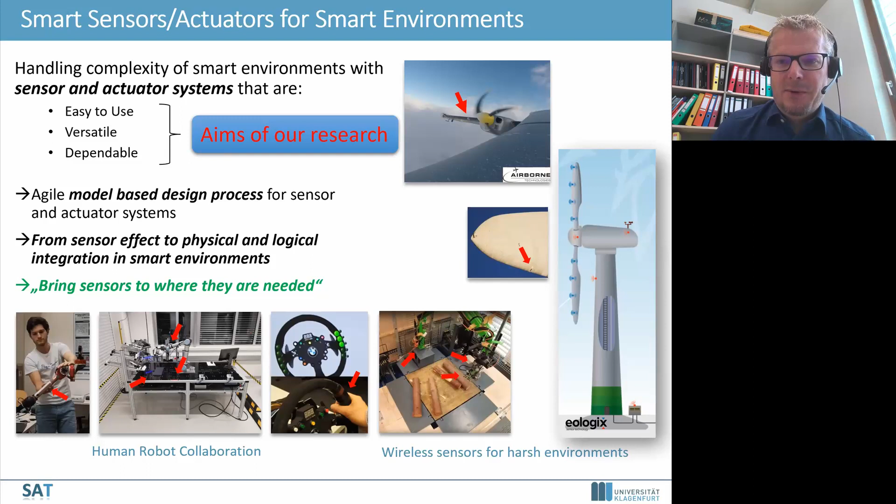And considering the development of sensors, of course, this starts really from the low level, from the technology and sensing principles, then the evaluation of the sensor signals and sensor electronics, and then signal processing inside the sensor. So we have a lot of low-level aspects to be covered, and also the simulation of the sensor effect, for instance, in finite element simulation, usually addresses just the sensor itself. But what has become feasible in the last years is to also consider the higher levels, like mid-level calibration, sensor fusion, and so on, even up to the high level of decision-making and task planning, which I find quite important for the functionality of the sensors and the requirements that we have.

And so designing a sensor first, then bringing it into the application, then developing the high-level applications, and at the end finding out if the sensor we have developed is a good device may not be the best approach anymore. So what we try to do is basically to speed up this loop and not follow this traditional V-model approach. Even in research, hardware development is quite often a time-consuming task until we really have this hardware and all the relevant components realized.

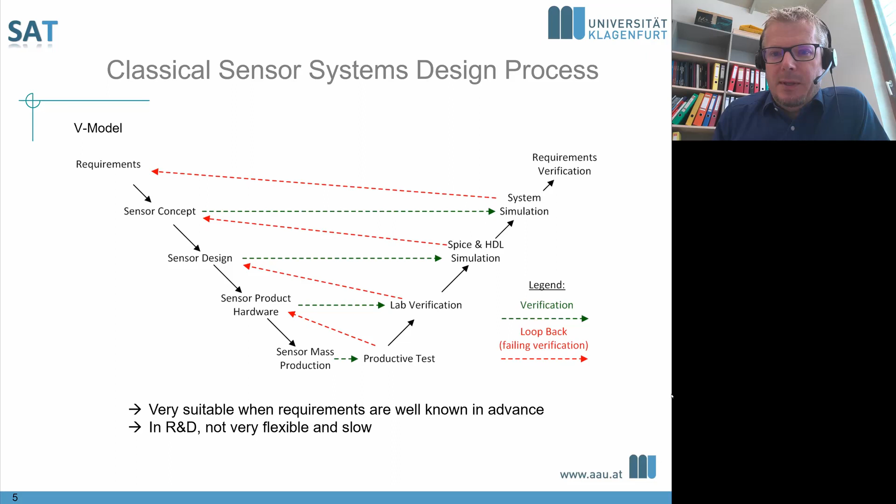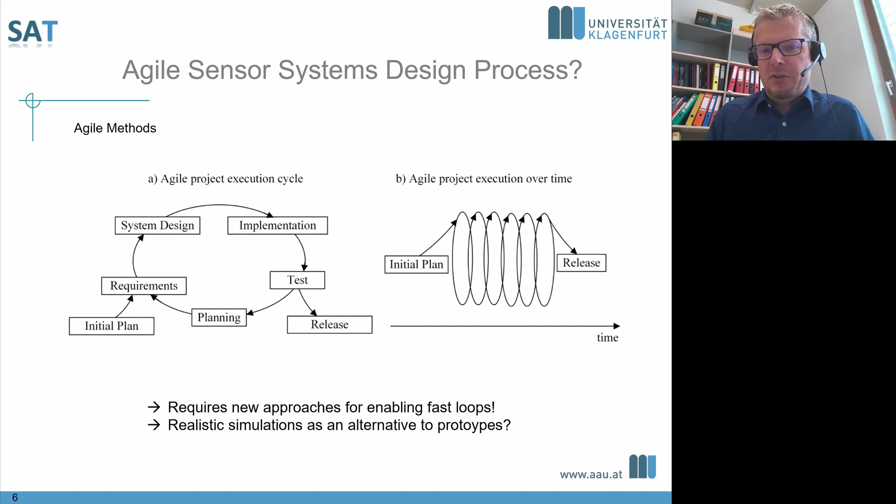So we also want to have a closer interaction with those who are strongly using the sensors on the higher levels, such that we can speed up the whole development in some sort of an agile process also for hardware development, get faster feedback, and adapt to what is needed in a better way. And since we cannot always have all these devices realized and implemented faster, one approach that appears to be interesting is to bring realistic simulations into system simulations so that we can showcase and discuss such implementations of sensors at an early stage.

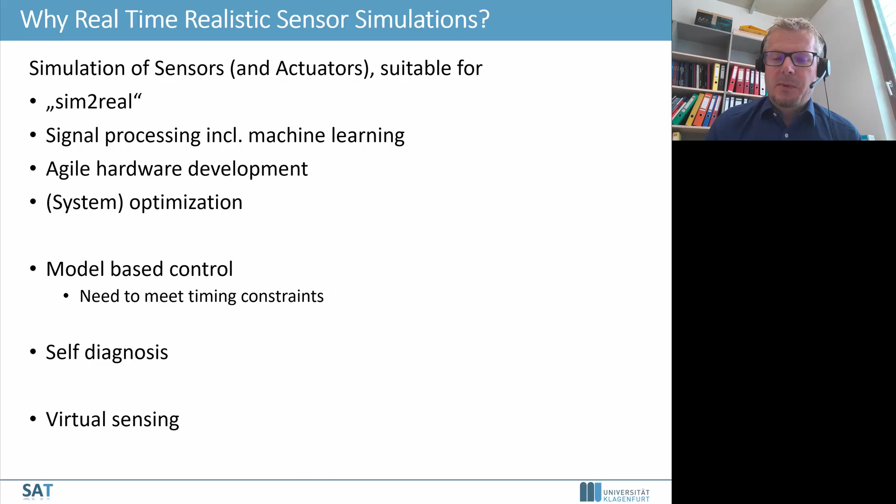And this is kind of a motivation for us. Whereas in general, of course, Sim2Real has been a buzzword lately, also using simulations, for instance, in machine learning and utilizing these experiments that can be done effectively on the computer. But for us, it also goes one step further, that we also want to use it in the development process already, and then we can have further benefits out of these models that we develop when they are accurate enough, like model-based control, self-diagnosis, and even virtual sensing can be based on such models. So quite useful from that point of view.

Nevertheless, I would like to show one slide from the second workshop on closing the reality gap in Sim2Real transfer robotics. That was at RSS 2020. And quite interesting, even the people who are interested in Sim2Real applications see this sometimes a little bit critically, like more than 20% even consider it a waste of money and time to go into this. Nevertheless, the majority believes it is useful. And also the majority thinks, okay, this is something new. It's not just simulation; bringing simulations that we have done for sensors for a long time together with the system simulation of the robotic application, and using this for the design of the devices is, at least for us, quite a new approach.

What is also debated is if high accuracy is needed for such simulations, and it is not that clear if this is really the case. And I will also go a little bit into this discussion. So our aim is actually to provide quite realistic models for our sensors, for the proximity sensors in this case that we are addressing here.

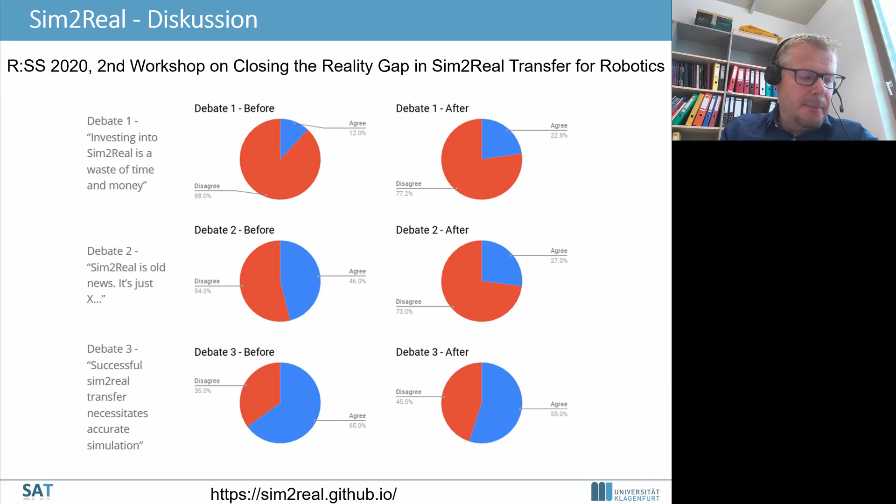Let's look a little bit at proximity perception sensors that are out there. Vision can be used, of course, also infrared; thermal emission is used in these scenarios. LiDAR, TOF cameras, flash LiDAR are also approaches that are used. Radar can be used, sonar, and near field proximity perception. We had in the previous talk also capacitive and inductive sensors. And then next to proximity is touch, which has been discussed quite a bit, that this interaction with the objects is one of the very big topics right now.

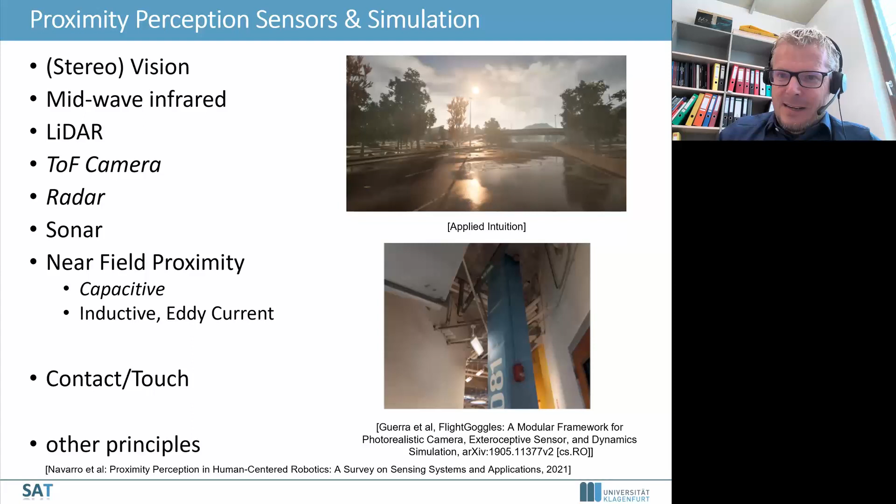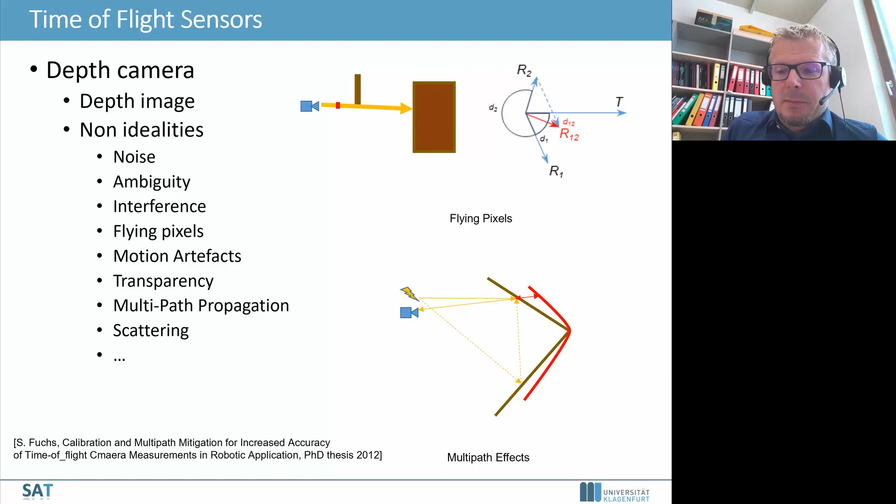So this is something that we are currently working on. There are already some solutions for these aspects, but I would say this is more straightforward coming from the computer graphics applications. But what we have also addressed are other proximity perception sensors that utilize the same simulation chain out of these computer graphics approaches.

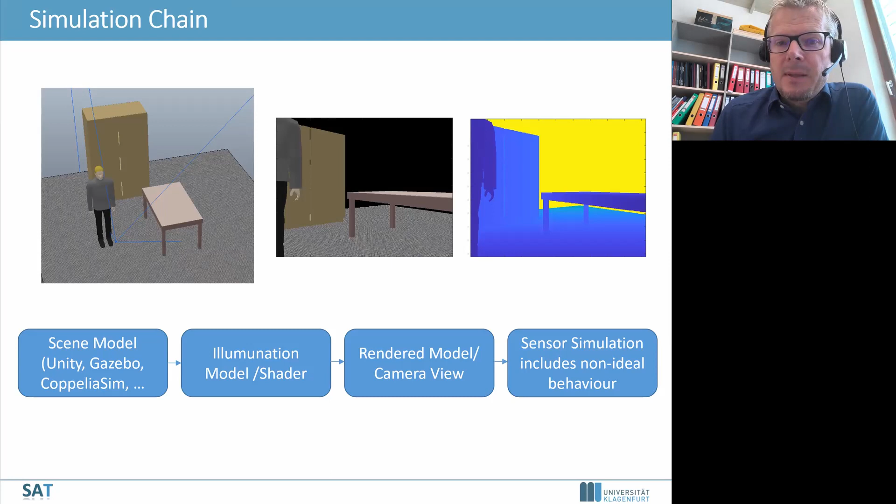You see here an illustration of a scene that gives us the visual image and also the depth image, which we can then take as inputs for these modifications to compute a sensor output out of such a representation. So we can use it to obtain the geometry information, and by encoding material properties, for instance, in the colors, we can also include information on the materials. When we compare now different principles, namely the three types of sensors to discuss today, there are time-of-flight cameras. They are high-resolution sensors.

We can more or less see this as single beams per pixel, so we have a clear and high directional sensitivity for these devices and a very high number of individual sensors. In the radar scenario, it's not as high resolution anymore.

Typically, we have few antennas, and the directivity of these antennas is not really just a single ray that we get, but we have accumulated somehow from different orientations, and we can still recover something with signal processing and these antenna arrays to recover, for instance, the angle of an object in the field of view when we have multiple objects, but still we have a rather low angular resolution.

And this gets even worse for the capacitive sensors, where we have even more blurred results for the scene that we look at. Nevertheless, we can take this chain that we had before to take here the input for a simulation that gives us then a more accurate model of the raw data that the radar sensor would generate and that the capacitive sensor would generate. And now I would like to go a little bit more into detail on how this is done on the example of the radar sensor.

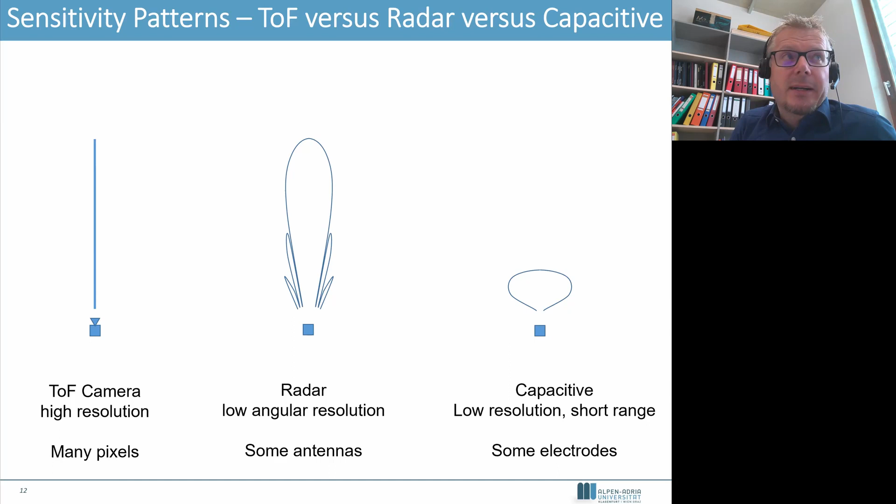General advantages are here, of course, that we have light-independent sensors with the radars that can also provide the speed of the object in the scene, but we do not have as many pixels as we have with, for instance, these time-of-flight cameras. Why would we simulate these devices?

Well, of course, to use the data for AI-based methods, but we also can test different sensor configurations that may not even be available yet in such a configuration with this number of antennas and so on. And so we can do studies in advance and basically even decide or contribute to what type of configuration of the radar sensor would make sense.

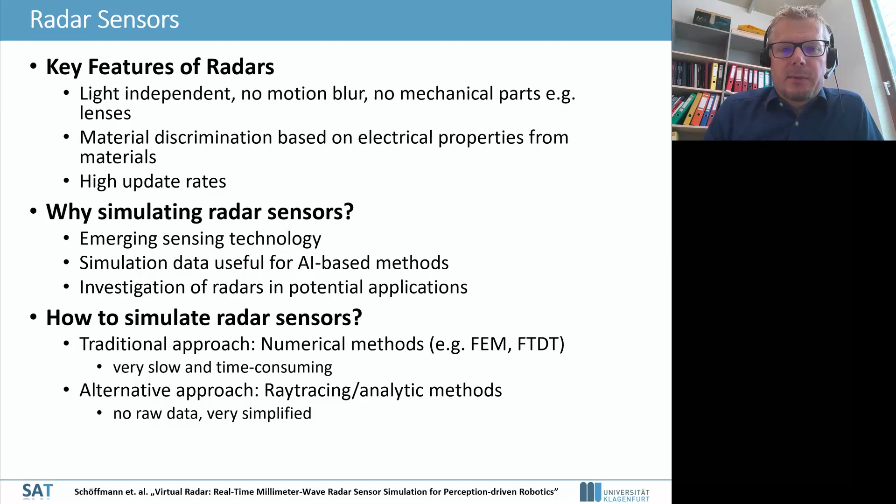And the simulation approaches like the finite element method and the classical approaches are comparatively slow. Ray tracing approaches are also rather slow. And so what we have done basically was to combine this with computer graphics approaches, giving us here the depth maps.

Quickly, how do these radars work? Specifically, we have been addressing here frequency modulated continuous wave radars. In essence, they send out the beam and modulate the frequency. So the frequency increases over time. And so there is a time delay between the received signal and the transmitted signal, and the time delay corresponds

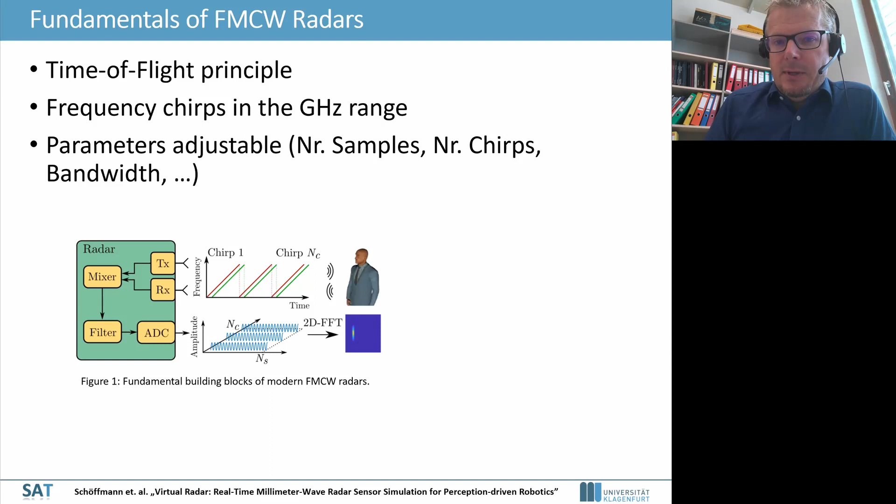to the frequency difference. And after mixing, basically this frequency difference can be seen, but it's not that you just get one reflection, but basically you get a mixture of all these reflections that we have in the scene, and this then leads essentially to the raw data that we receive.

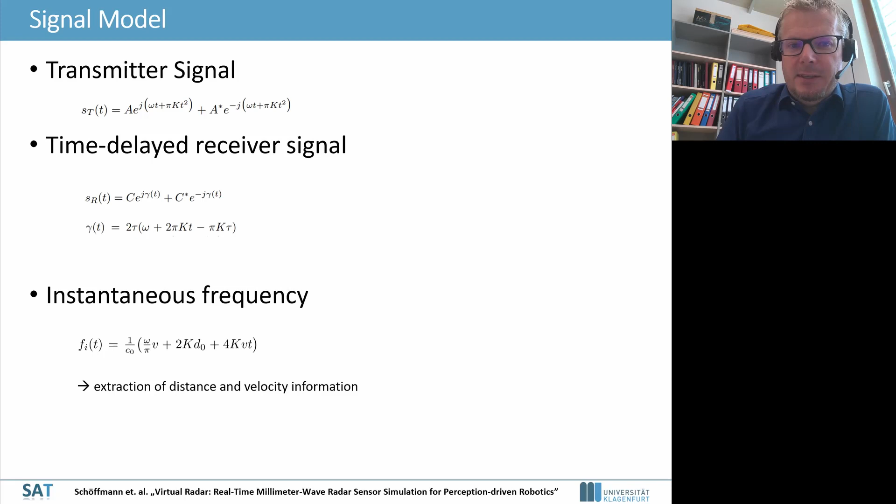So basically, we have a transmitted signal, a time delayed received signal, and the frequency corresponds at the end to the distance. And we can also do another Fourier transform over subsequent chirps to also obtain the velocity information for this received signal.

And in the modeling, basically, we take this image that we get from the simulation, so actually the camera representation is the depth camera, and then from all these contributions of all the individual pixels, the received signal is computed, and the reflections on the surfaces follow a comparatively simple model, which has a diffuse and a specular component on these surfaces of the objects.

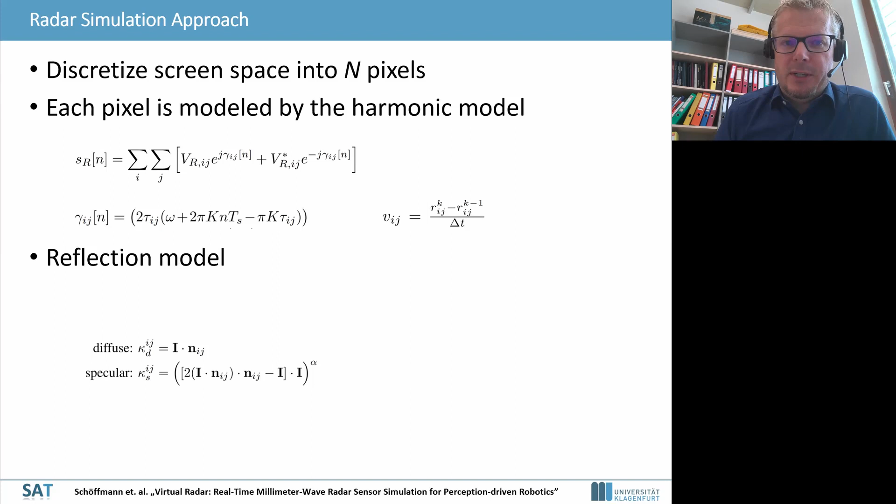What can also happen with these radar sensors is that non-conductive material is partially penetrated, so you get reflections from each boundary essentially, not only from the first boundary. So here multiple Z buffers could be used, and then the signal can be combined from the individual distances. So the larger the distance, the higher the frequency.

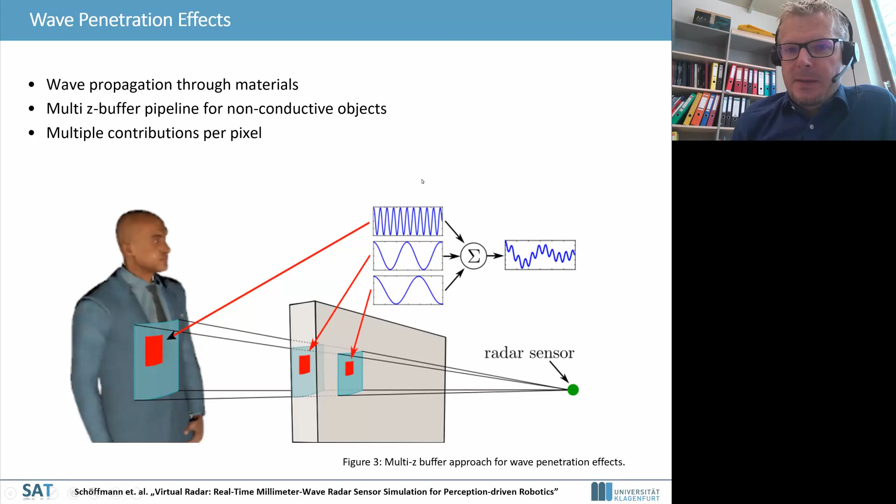So at the end we get a mixture, and finally applying an FFT, you can actually again resolve these different components and say, okay, we have more reflections, more distances here in the scene. So this has been included here. For a simple scene here with 3 rods, as shown, it was also tested in comparison with real measurements.

Actually, you see here that they are quite nicely resolved, and you also get this point cloud representation. So each of these rods essentially represents one point in here, and this can be nicely resolved in such a simple scenario. Here, every object is clearly distinct from each other, and the simulation and the real scenario have quite nice overlap, so very similar results.

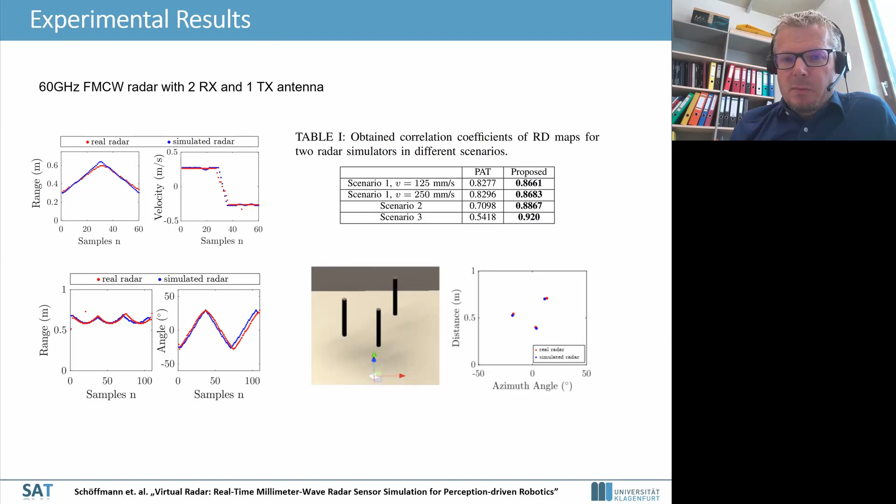The situation becomes much more difficult when we are in more realistic scenarios, like here, a human moving around, and there is not just a single object, but this one object with these extensions and so on gives, of course, a mixture with different distances, and then just assigning more or less one point to it is quite different.

And this is not just the case for the simulation, but also for the real radar. And what we see here is that we have quite some variability in both signals. Nevertheless, the general behavior or the general characteristic of both scenarios is quite similar. So even if we would tell the human to take the same trajectory twice, there would be a difference between this, and this difference would not be much more than what we have between the real radar and the simulated radar.

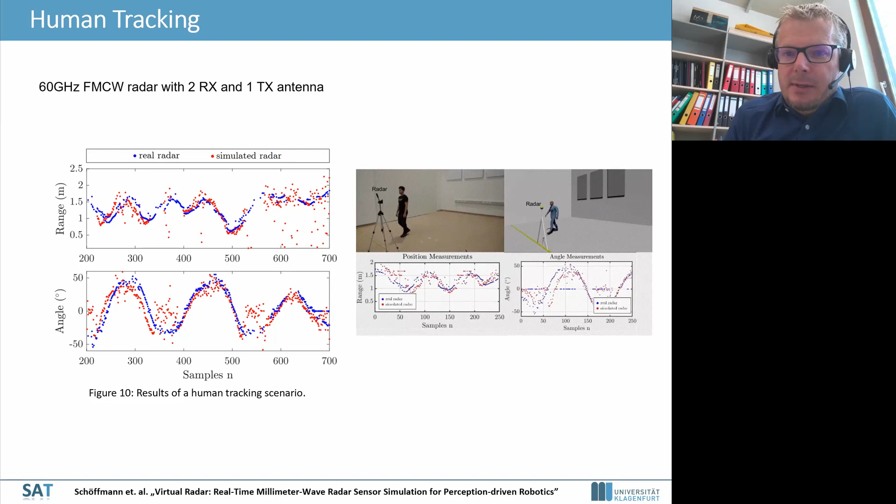So still, this is considered a reasonable accordance between the simulated and the real data. And in particular, we have also compared it with other approaches and still get a good match with the real measurement data.

And as mentioned, this can also be investigated with obstacles in between that are transparent or partially transparent for the radar signals. And also here we have similar characteristics, but you see basically that you get an additional reflection from this object in this representation on the left that shows basically where this object is and with which velocity it is actually moving.

So this work basically was presented this year at IROS. The main contribution is from Christian Schöffmann, also present in this meeting today.

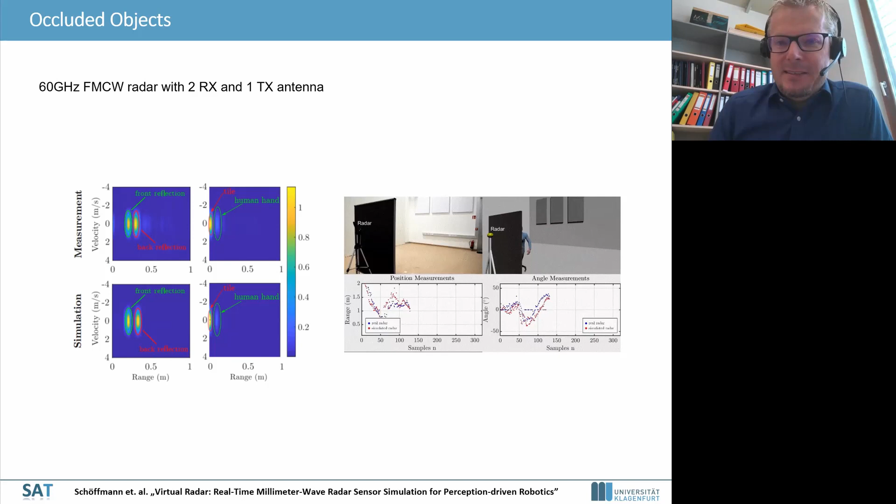But we are not restricted here to use this same approach from computer graphics for radar sensors, but we can also use it for capacitive sensors, with the difference basically that the characteristic is even more different, and we cannot use here this ray-type approach that we use for the radar and time-of-flight sensors, because we have a much different interaction between, for instance, the human and the field of the sensors.

You see this here on the top left with different modalities. So between two electrodes, there's an electric field. This might lead to an increase or decrease of the capacitance depending on the design of this electrode configuration. And so there are different modes how the sensors can be operated to get at the end an estimate about the distance and location of the object.

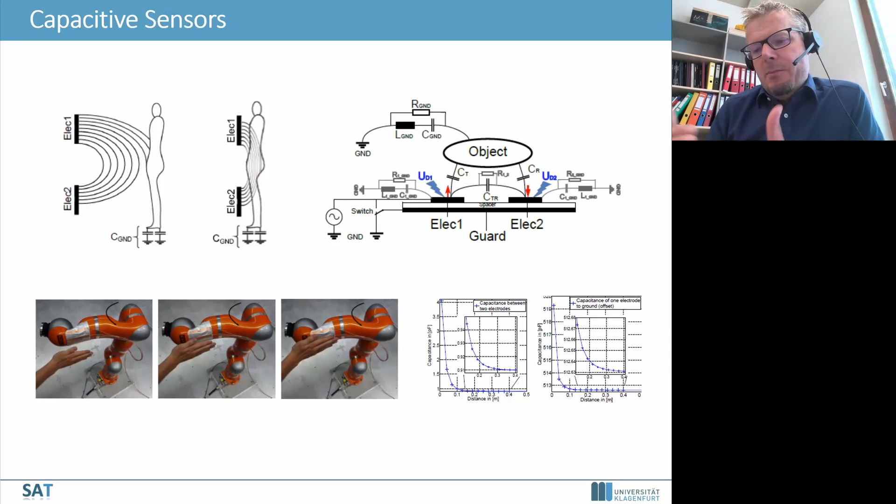This can be used if you have multiple electrodes, not just two. This information from these various electrodes can be fused, leading to the electrical capacitance tomography approach. So basically then from a number of capacitance measurements between electrodes, the distribution of the material can be reconstructed.

And you see here basically some results from the PhD thesis from Stefan Mühlbacher-Karrer on proximity sensors, but also on a gripper sensor. I'm not sure if you can really nicely see the true location of the object and the reconstructed image of the object. You see, it's not a sharp image as you would get it from vision. Nevertheless, the capacitive electrodes can be easily integrated into the surfaces or even into the fingers of such a gripper, which is an advantage.

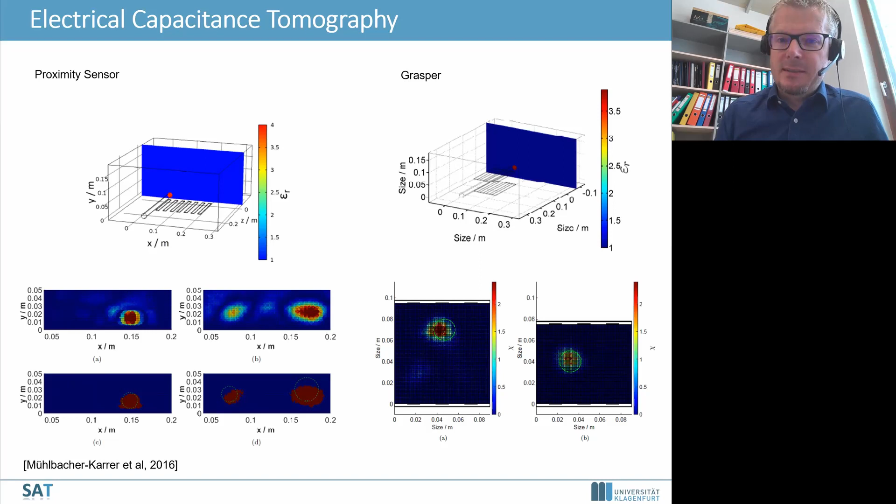Nevertheless, this is still a decoupled thing. So we have done this work here in the lab, just the sensor alone, but I believe that there is huge benefit if we could consider much more realistic scenarios, not just such a single rod that we have, and also measured, of course, in the lab, but also in the simulation. We would also want more realistic scenarios to find out what is a good configuration of the sensor. And this brings us at the end again to the system simulation.

And the example that I would like to give here was already presented in 2019 at IROS for a forestry crane, basically, which has the task to automatically order some logs. And here we also believe in the interaction of even machinery with the environment. It's beneficial to have some short-range proximity or even tactile information, and to bring sensors into the gripper of this forestry crane, with requirements with respect to the harsh environment that's out there.

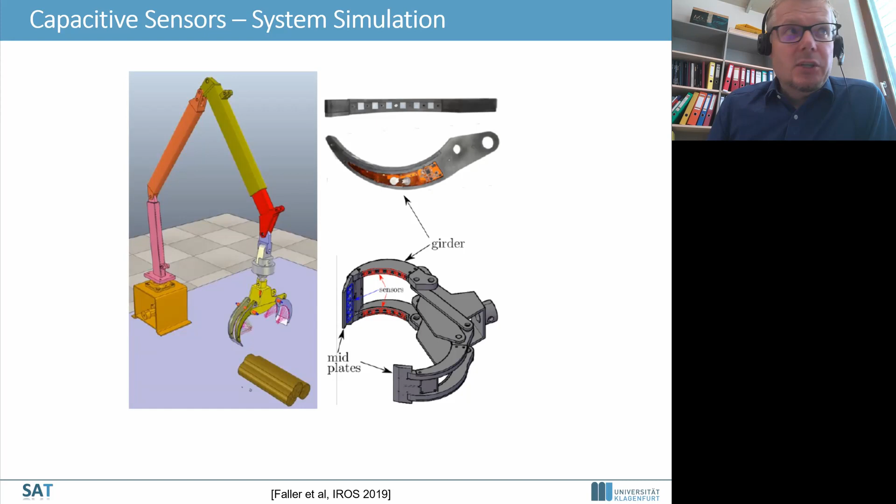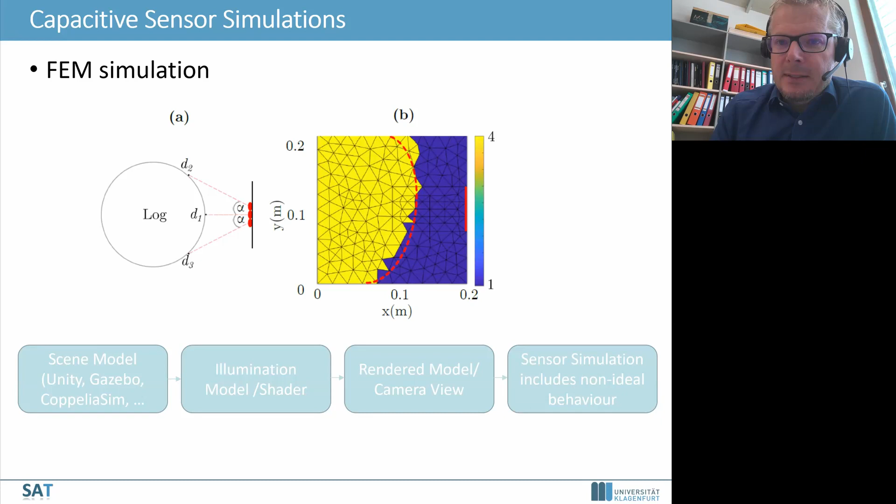But again, we started here with the simulation and used the same approach basically to get from the robot simulation some 3D representation of the geometry, which we then applied for a finite element simulation with some approaches to speed up the whole computation, like avoiding remeshing, for instance, such that this can be fast enough at the end. So this is a similar approach, and here we should, if it runs, okay.

See some results here. So basically the log is grasped here, and the capacitive sensor inside the grasper detects, due to the higher permittivity of the log, that the capacitance increases. And this can also be done here with multiple sensors. And then from this multiple sensor information it can be inferred how the log has been grasped and if this was a successful grasp or not.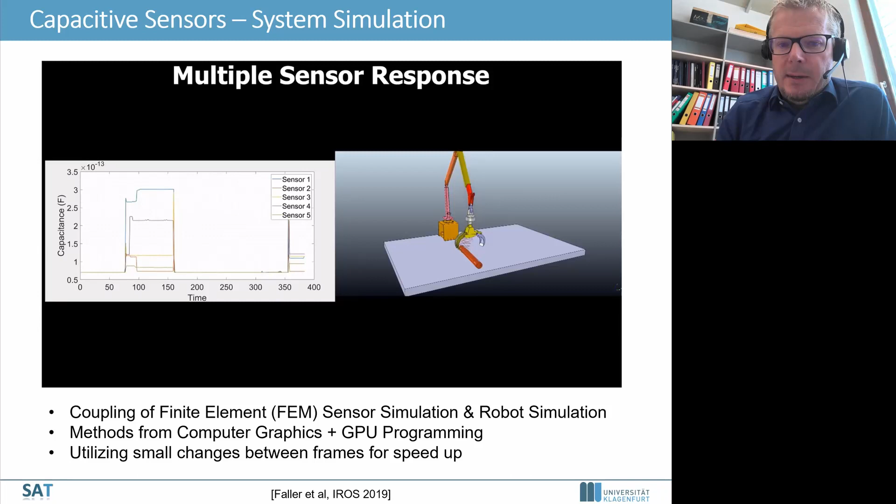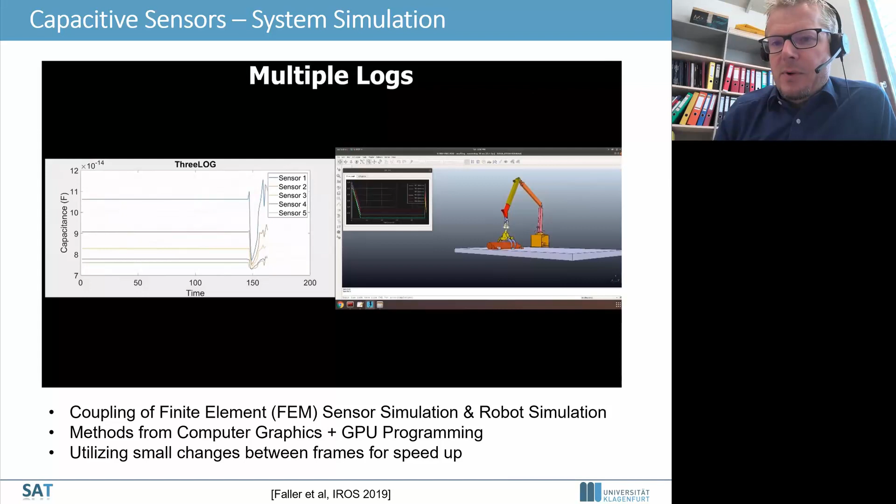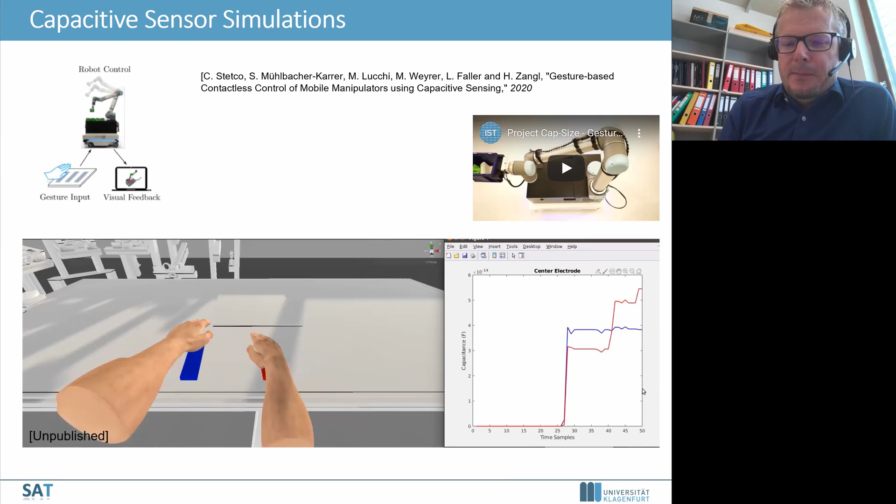So this was a scenario for an industrial application, considering a crane as a robot somehow, but this can also be done for interaction with humans. So this is another work from Christian considering a model of a human hand, and the sensor has actually in this case been built before. So in 2020 he presented a gesture-based contactless control of a robot. So you could use gestures basically to control the robot. But after that it was shown that this simulation framework also works for this gesture control.

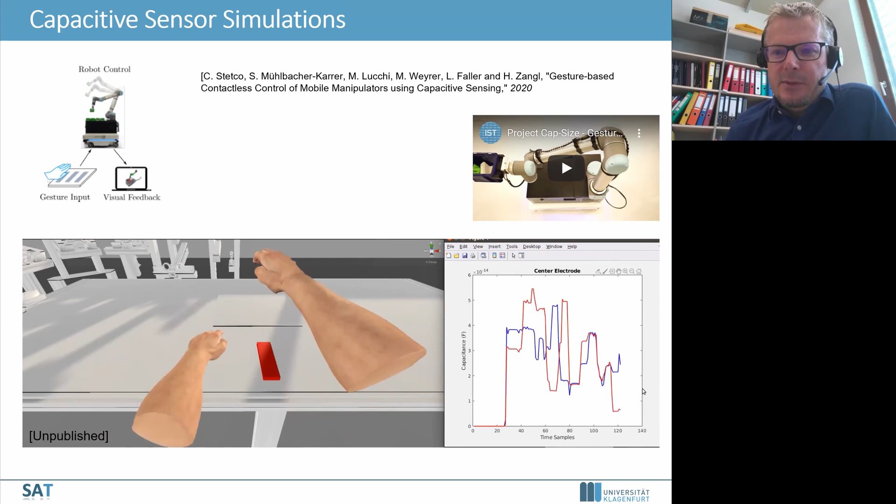So basically you see with the increasing distance, the capacitance for the red electrode is decreasing, for the blue one increasing, and at the end there will be also some motion, and then the phase shift, the signal delay that we have between the blue and the red signal, the orientation of the movement, and also the velocity can be used to realize the gesture-based control, which has been done in this scenario. Okay.

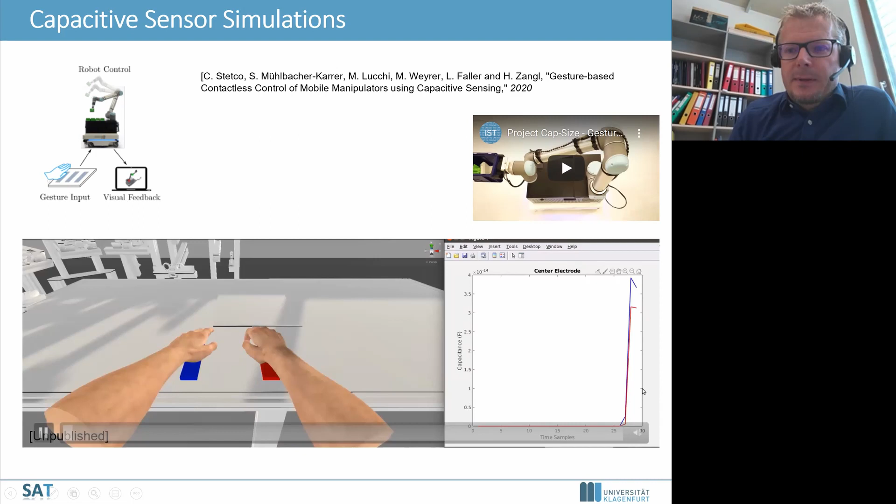So at the end, such a system of capacitive sensors, we can model it, we can do some lab tests. It's also intended, of course, for use with human-robot interaction. So there has been some work with the colleagues from Chemnitz and Karlsruhe regarding assessing the performance of capacitive sensors. So for different parts of the body, the characteristic of a capacitive sensor is different.

And Serkan Ergun, who has also been driving a lot of the work on our side, will give some deeper insight into this in the PhD talk, because he's working in the area of safety connected with proximity sensors like capacitive sensors, and how we can use this, for instance, for power and force limiting even before the contact has occurred.

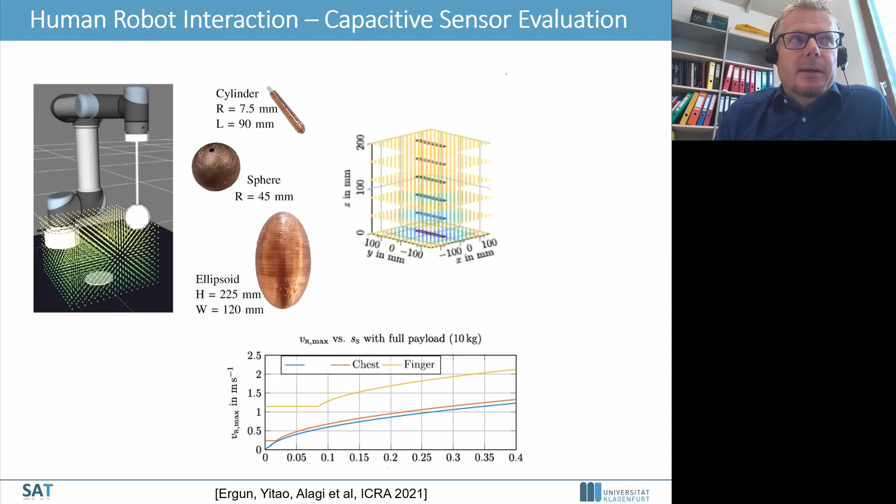So I have one last thing to close the gap to the initial thought that we want to have some sort of agile development switching between real application and simulation. So we also work on this transition: once we have decided that in the simulation we have a good architecture, how can we quickly realize the sensors? So we have more or less the same interfaces for simulation models and lab models, and how to bring a sensor into the system is governed by some sort of electronic data sheet that helps us speed up the process and maintain and exchange data that comes from the simulation and data that comes from the lab model.

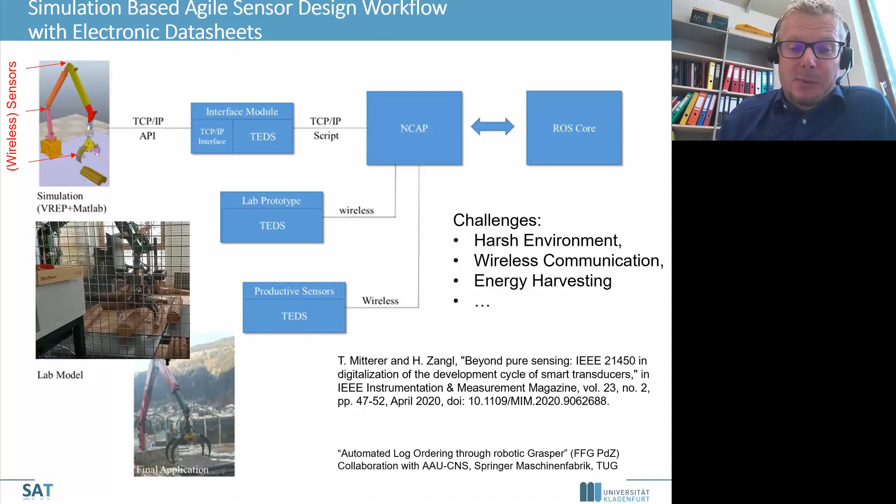We want to use the simulations at the end to realize sensors, even with integrated circuits, bring this into the sensor assembly, then bring it on the robot, and then use this in the robotics application, but avoid doing this in a sequential approach. You can do the work on the sensor development and on how to use the sensors in parallel.

So summing up, I would say that with the progress in computation, GPUs and so on, that can be used for computer graphics and also for fast realization of finite element methods, we now have reasonably accurate sensor simulations that are fast enough to be included in robot simulations. We have accurate sensor simulations that are reasonably accurate to be included for such investigations, such that we can use the information we get there in the sensor design phase, but also in machine learning approaches, the quality should be good enough.

We also can think about doing things always sequential: design the sensor, then maybe do some signal processing, even with machine learning for the sensors, for instance eliminating in this time of flight sensor the flying pixels or whatever, or in the radar sensors, we could also try to get point clouds out of the radar sensor, because this is a more common way to use 3D representations.

But when we do this link along the full chain from low level to high level, I think we can benefit a little bit, as at some point when we reduce the information, for instance from the radar sensor to just a single distance and location of a human, we lose information. So I believe that if we can maintain it as long as possible, that will be helpful, even though it adds a bit to the complexity. But having all this into one common simulation framework should help make such approaches feasible.

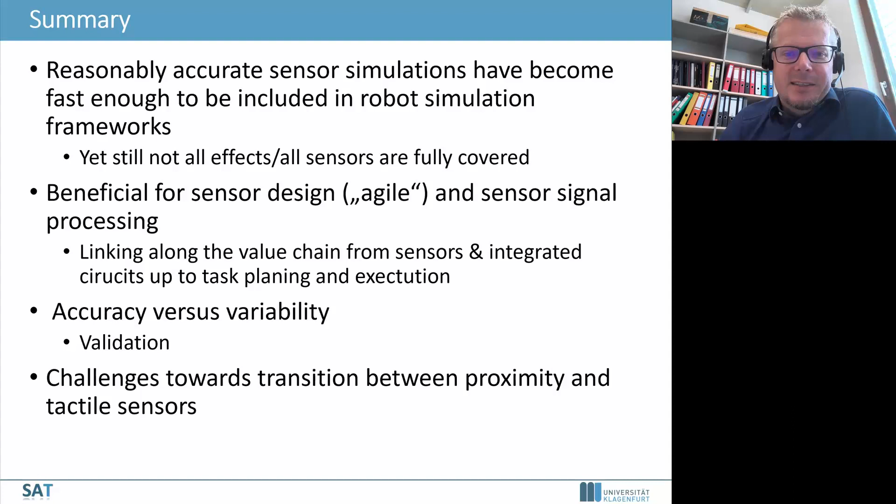I have to thank a lot of contributors. Some of them I mentioned in the talk, like Christian and Lisa, but also the team is of course very important, and the partners are very important here. And we have the material, the videos that I've shown, also online. I just would like to point out that the radar simulation is open source and available, and there is still work to do, so contributors and users and feedback are very much appreciated.

So I hope that this finds your interest and feedback. This brings me pretty much to the end of this overview on simulation of proximity perception sensors. As I said, there's still some work to do, something we can already show, and hopefully some more things to show in the future with my active team. But as I said, we're also very happy to collaborate, like Catherine mentioned before, so that Christian will have a collaboration there.

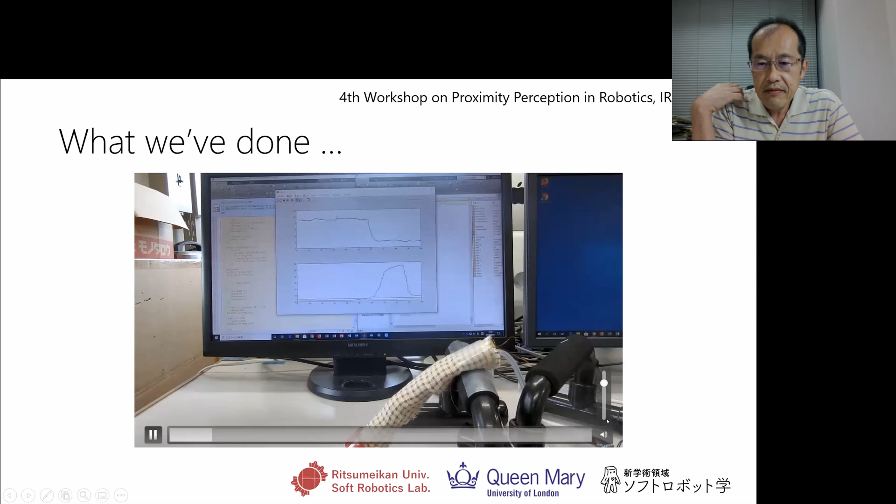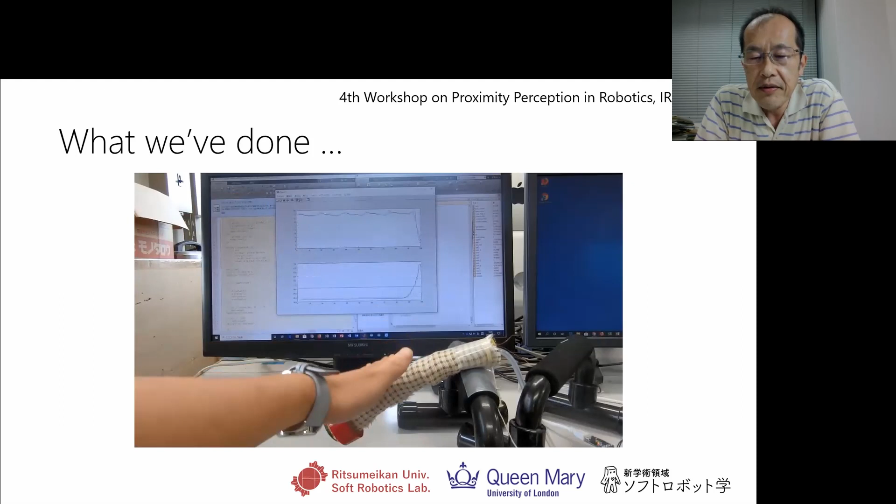First let me show what I've done here. So this is the variable stiffness link, covered with the fabric sensor. As the hand approaches the link, this link reduces its stiffness by reducing the inner pressure. And as the hand departs, the sensor recovers and the link recovers its stiffness by increasing the inner pressure. So now we can control the stiffness of the link according to the approaching target.

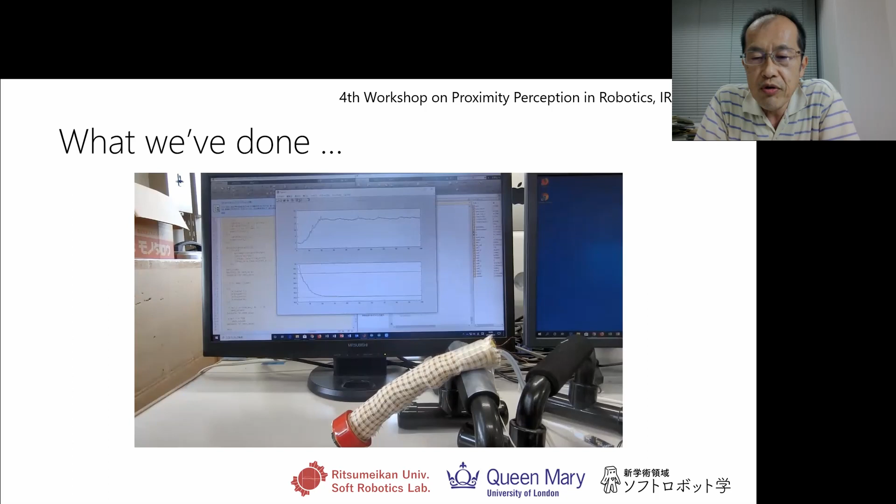Our approach is just to combine soft bodies with soft sensor skins. The bodies here, the variable stiffness links, were developed at King's College London and Queen Mary University of London. And here's the sensor skin, which we have developed at Ritsumeikan University. Now we have combined these variable stiffness links and also these fabric sensors to realize safety for human-robot interaction.

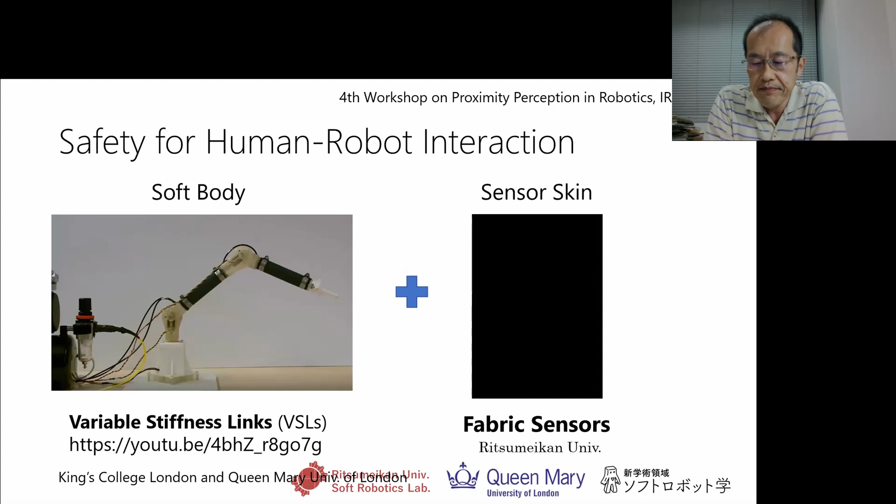But first, let me talk about the variable stiffness links. This link consists of an inner rubber tube and also an outer fabric layer. When air pressure is applied inside the link, the inner tube will expand, causing contact between the inner tube and the outer fabric, increasing the friction between them. Then the stiffness will increase. When you reduce the inner pressure, we can reduce the stiffness of the link.

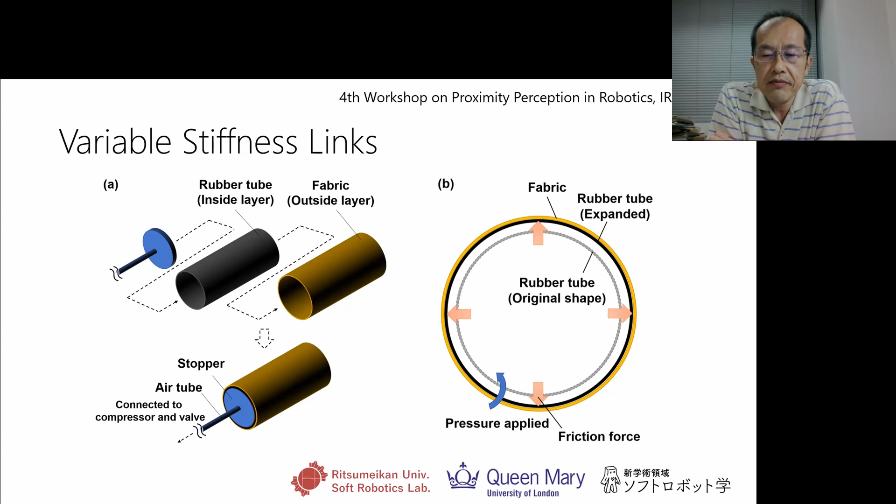Here's the fabric sensor. Basically this is a very simple one. This is conductive fabric, available on the market. This fabric consists of a plain knitting of conductive and non-conductive yarns. The good thing about this sensor is that it's bendable and also somewhat stretchable. It means that we can attach this fabric sensor to soft bodies and measure the capacitance. We can apply many principles - resistance-based, capacitance-based, and so on.

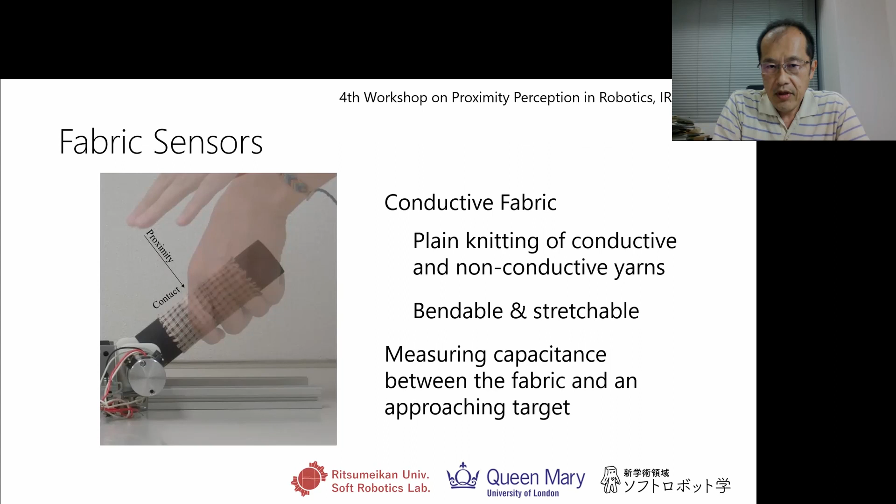But here we applied capacitance measuring. Just by measuring the capacitance between the fabric and the approaching target, we can estimate proximity and also contact with the target. Just by replacing the outer fabric of a variable stiffness link with this conductive fabric sensor, we can construct a variable stiffness link with a fabric sensor easily.

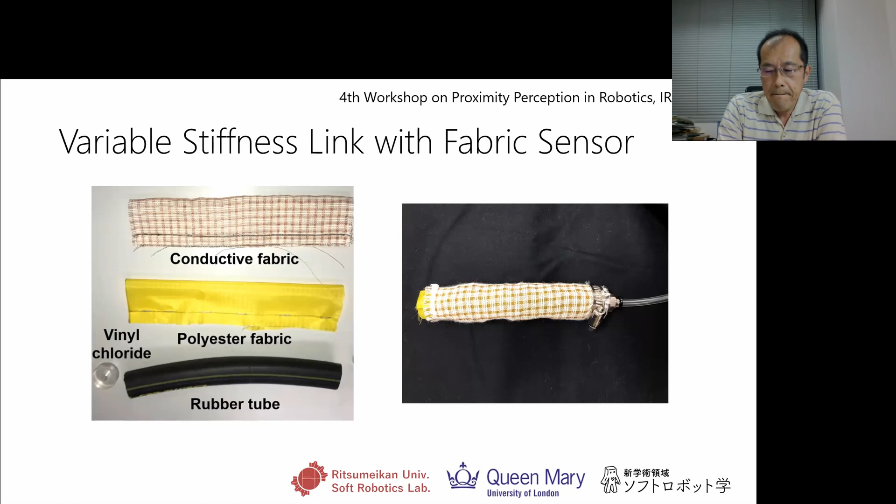Okay, so here's the sensing principle. If the target is far away from the sensor, the capacitance value is almost the same - basically stationary. But when the target is approaching the sensor, the sensor value will increase. And when the target is in contact with the sensor, the value will jump up. Just by monitoring the sensor output, we can determine if proximity of the target happens and also if contact with the target happens or not.

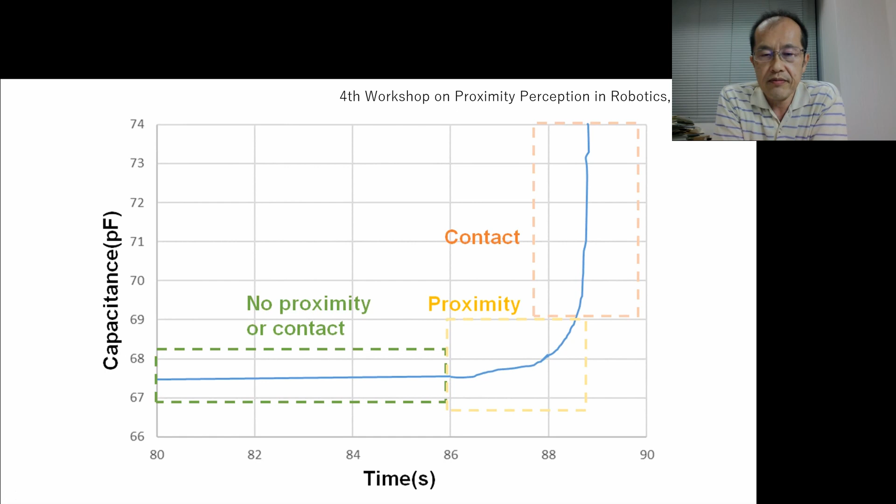To realize such detection, first we will determine the reference capacitance - when nothing is nearby the sensor, this is the reference. Based on the reference, we determine two thresholds for proximity detection and also contact detection. So the problem is, how do we determine the reference capacitance?

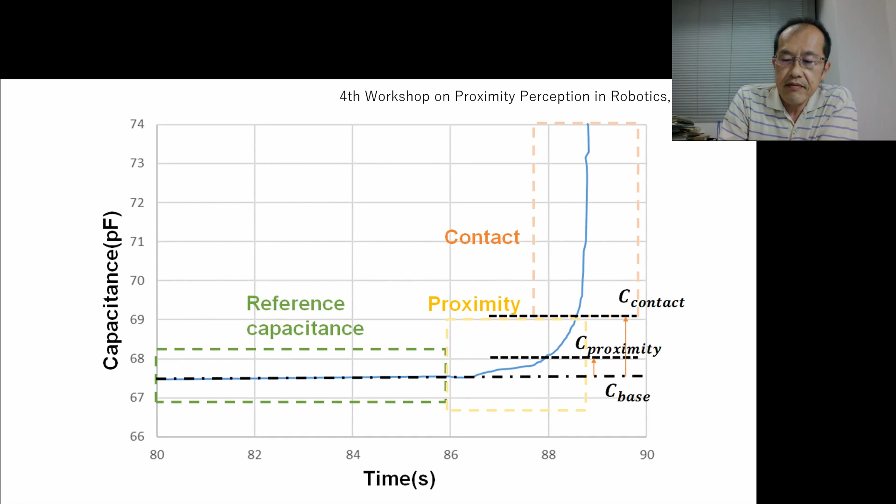Okay, so here's the sensing method. Just by comparing the capacitance output with the two thresholds, you can determine if contact happens or if proximity happens.

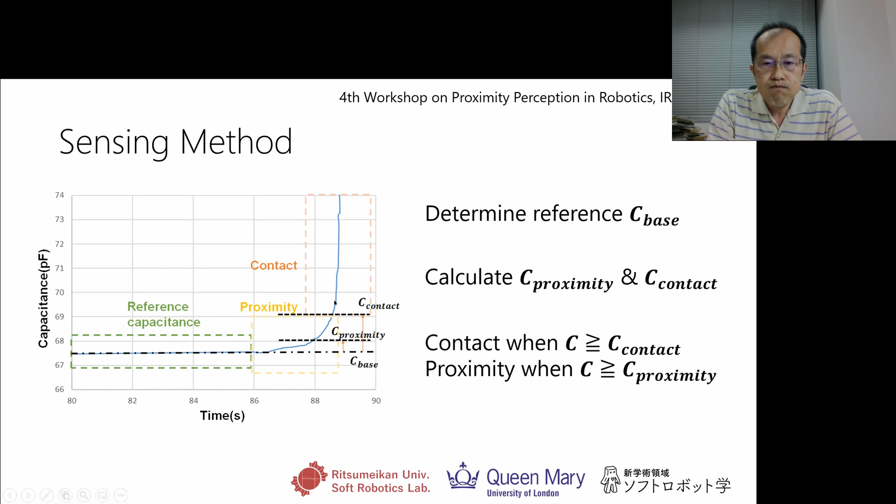Because this is a simple implementation with this algorithm, this is the first demonstration. So this is a simple rigid link setup - two links, covered by two fabric sensors. But one problem happened here. So this is the desktop display, which will show if proximity or contact happens or not.

So here you can see, even though no target is approaching the link system, the algorithm determines that proximity or contact happens because the two links are moving closer to each other. This means that if we determine the reference capacitance and the two thresholds as fixed values, we cannot cope with such motion of the robot links.

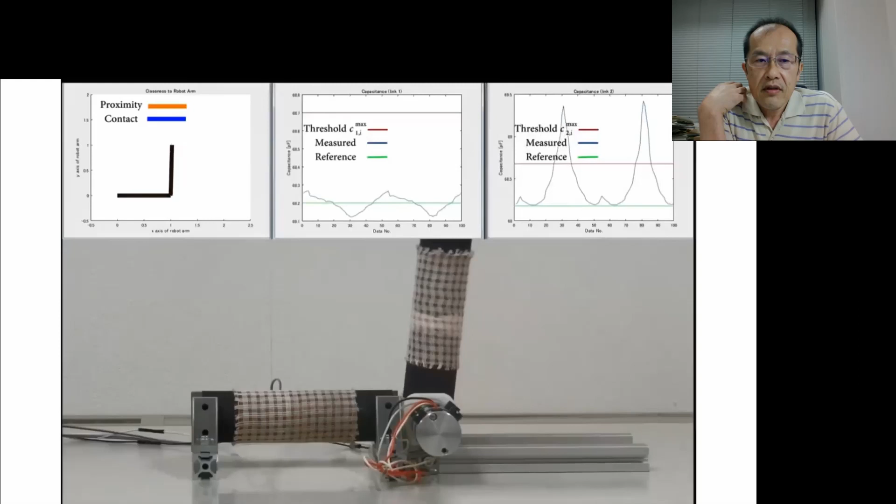In addition to the capacitance being affected by motion of the robot links, the capacitance also depends on the environment - obstacles, temperature, humidity, and so on. Many issues will affect the capacitance. So the problem is, even though we have no target close to the sensors, the capacitance may change according to the motion of robots and the change of environment. This suggests that the reference should be updated according to the motion of the robots and also the change of the environment.

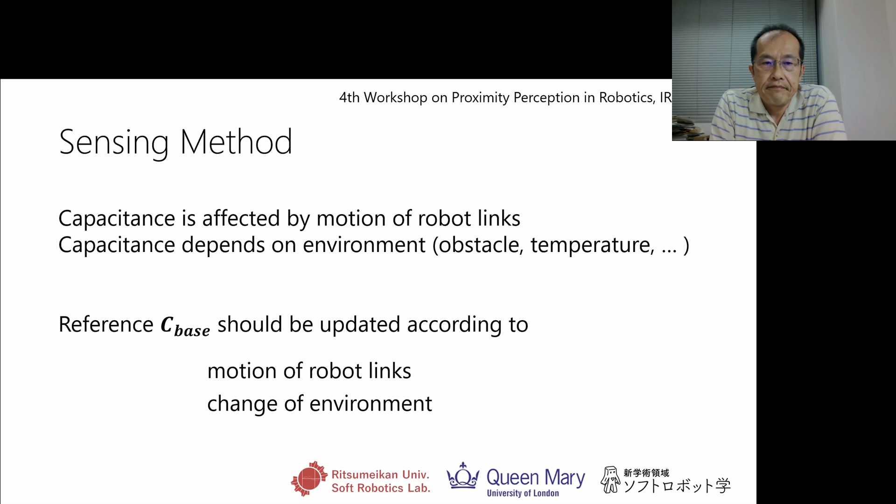Okay, so this is the idea of how to cope with the motion of robot links, how to update the reference capacitance according to the robot motion.

We assume that we can obtain the link motion using internal sensors, for example encoders. We can measure the joint angles of the robot by using encoders. But first of all, we measure the capacitance values under the robot motion.

We will record the outputs, two outputs: the capacitance sensor values and also the internal sensor values, and also the relationship between the two sensor outputs, which is summarized into a lookup table. Then the reference, given the internal sensor value, can be picked up by searching the lookup table. This can be a reference value.

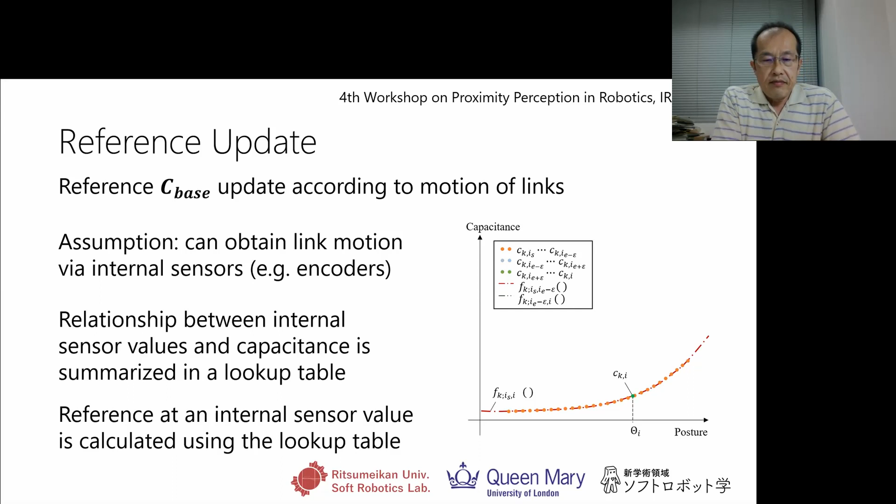Next, here's how to cope with the change of the environment, how to update the reference capacitance against the change of environment. We assume that environment change is slower than the target approaching.

Of course, sometimes a sudden change of the environment may happen, but after that sudden change, the environment is somewhat stationary. It's an assumption.

We'll monitor the average and also the variance of the capacitance values over a given period. If environment change happens, the variance will be bigger. So we'll update the reference to the average value when the variance exceeds a certain value.

By implementing these two algorithms into one sensing algorithm, we can cope with such changes, updating the reference capacitance against the motion of the robot and also the change of the environment.

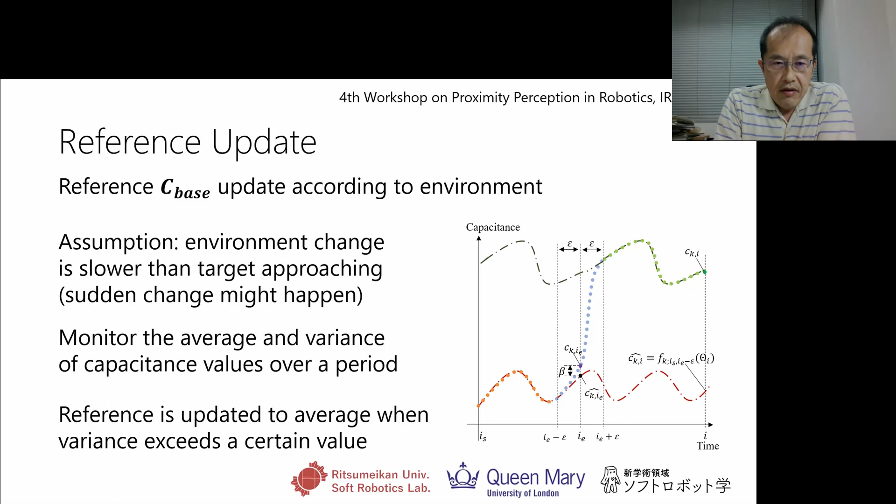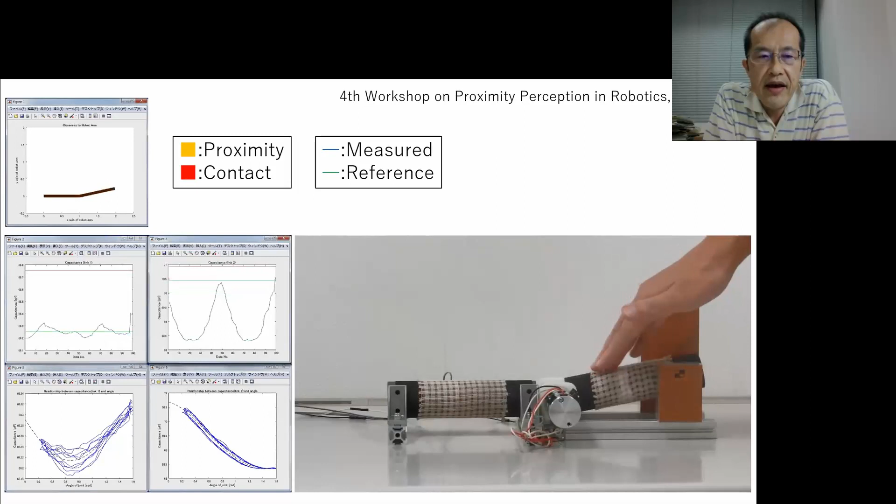Now the reference has been updated, and now the sensor system ignores the obstacles in the environment. But when a human hand approaches and touches, the sensor system can detect the proximity and the contact of the human hand.

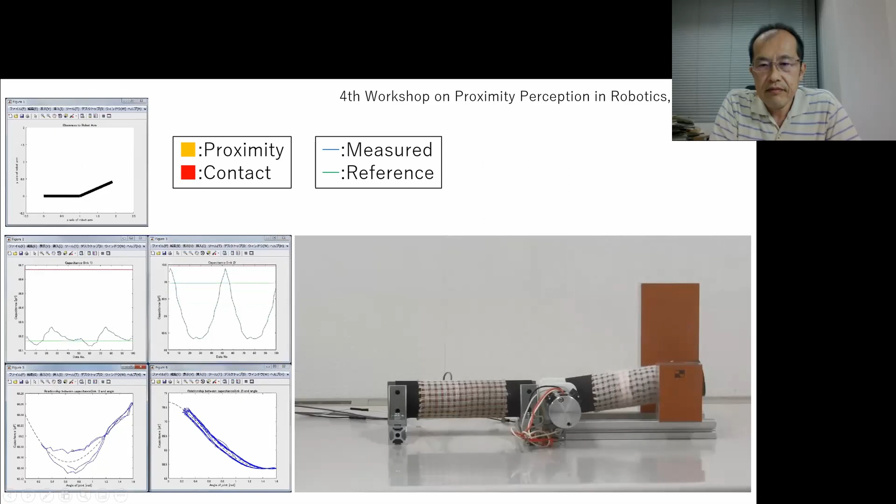Using such update algorithms of the reference capacitance, we can cope with the motion of the links and also the change of the environment as well. And also, even after removing the obstacle, the sensor system can adapt to the change of the environment.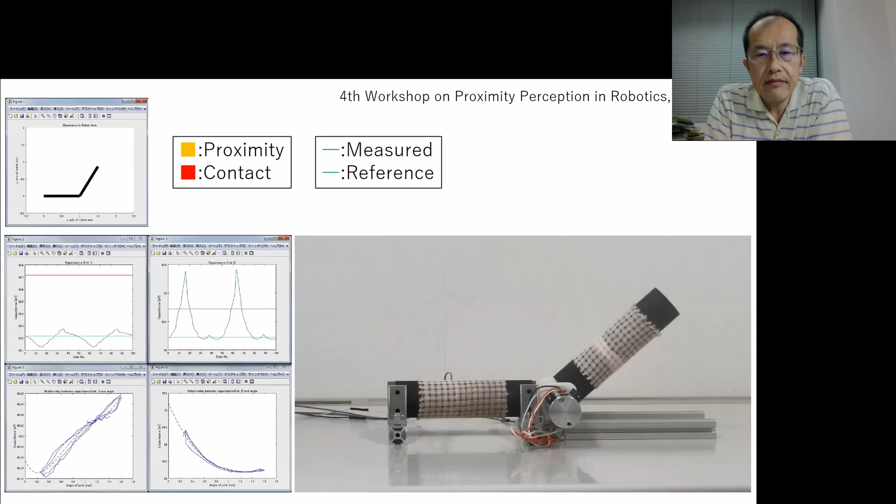Now we have applied this fabric sensor and the sensing algorithm to the variable stiffness link. Here's one demonstration: this variable stiffness link covered with the fabric sensor.

I'll show again: the pressure reduces. After that, the pressure increases again. So the stiffness can be controlled according to the approaching and also the contact of the human hand.

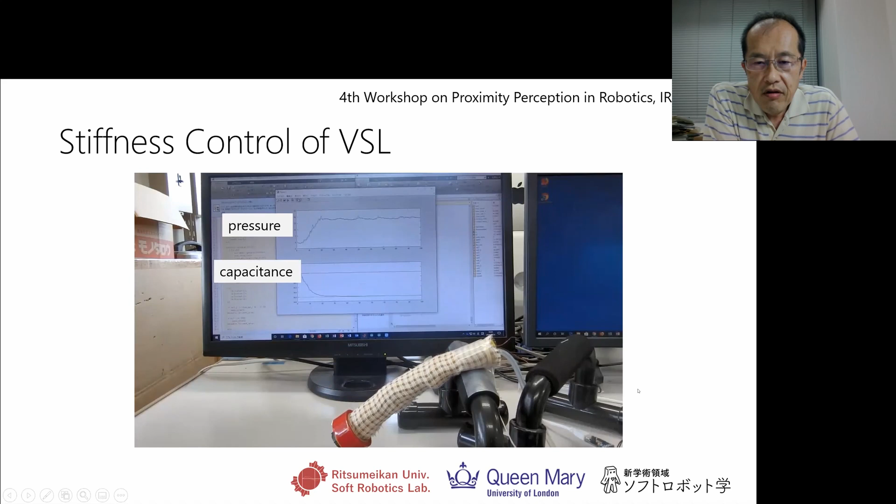Okay, so now we're testing the system. So now we have two variable stiffness links with these fabric sensors driven by one servo motor.

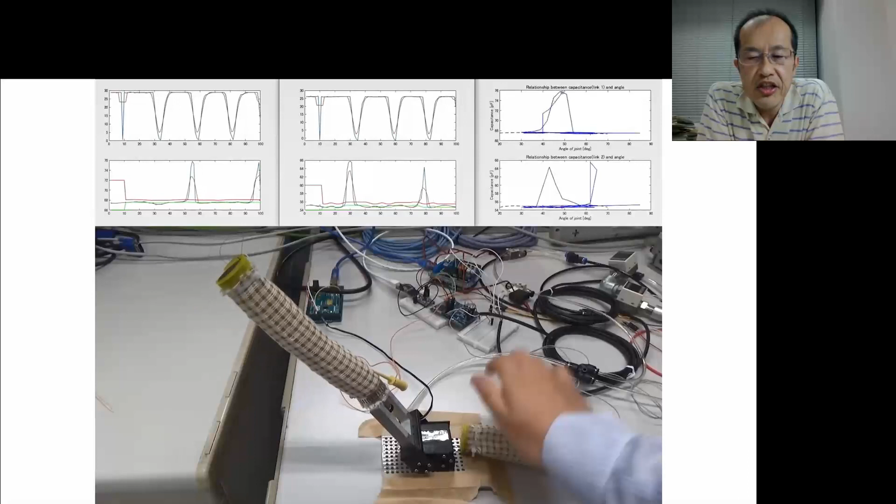Okay, so even though the two links are crossing each other, we now change the reference capacitance to avoid the influence of the robot motion. But if the human hand touches either of the links, the system will stop. So the fabric sensor detects the contact, and the system will stop.

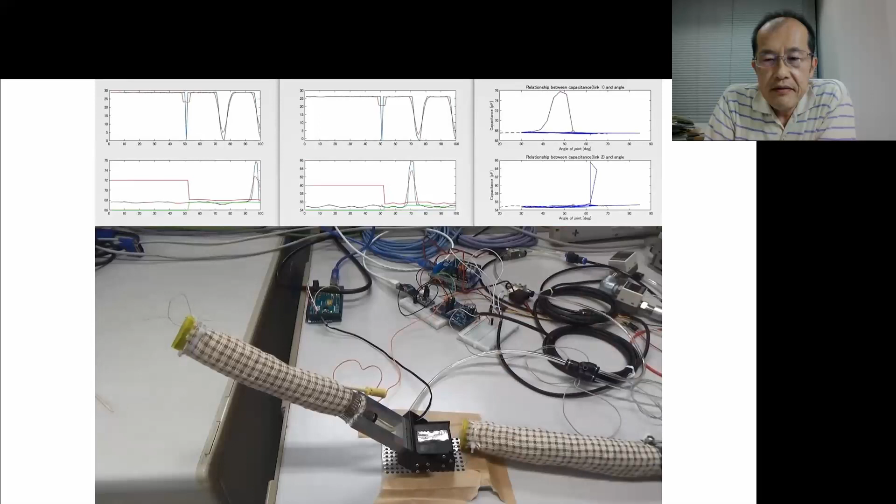So it means that now we are considering how to cope with this phenomenon, how to compensate the effect of inner pressure.

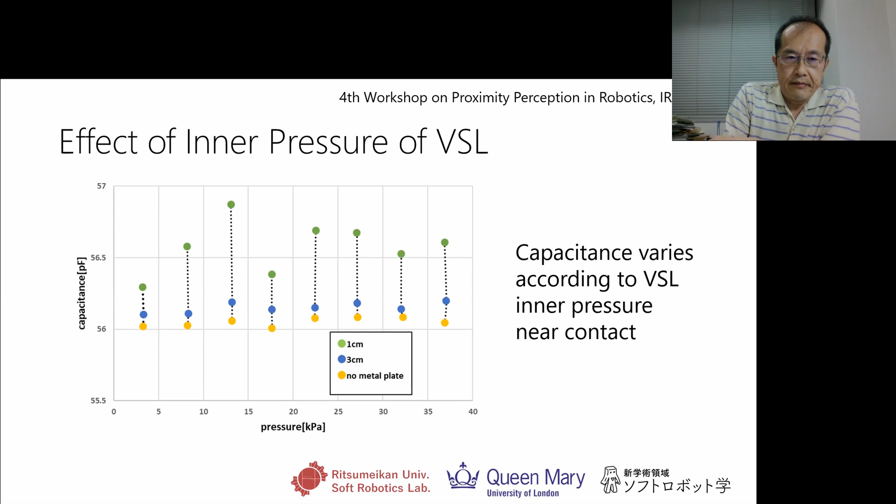Okay, here's the conclusion. Now we have developed variable stiffness links with fabric-based sensors, and we have also developed a reference update algorithm to cope with the robot motion and the change of the environment, and also experimental validation of safety control. Here's the ongoing issue: adapting to the inner pressure of the link, and also experiments using robot arms consisting of multiple links.